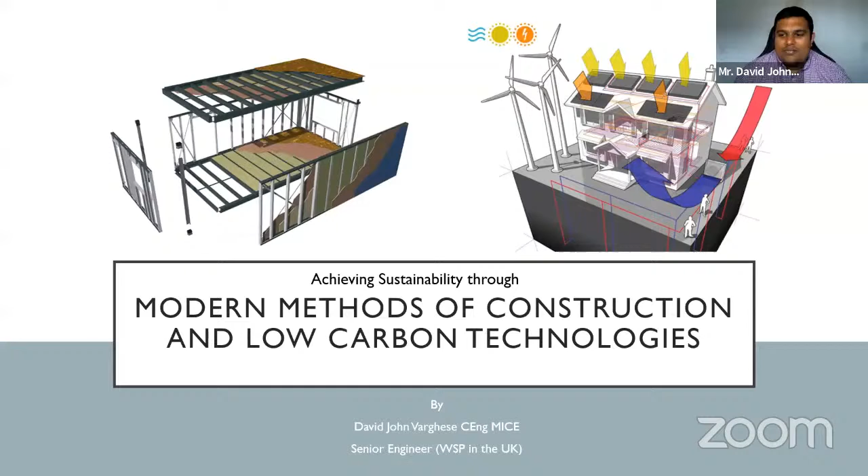I also thank my dad, Mr. Varghese, for asking me to do this, and hopefully make all of you, or at least some of you, think about how we can do better to improve sustainability in the work we do on a daily basis.

The presentation would approximately run for 50 to 55 minutes, with ideally a 5-minute break somewhere in the middle if required. The session would ideally be divided into an introduction about the industry in terms of energy usage and the need for MMC.

And then I would briefly explain what goes into achieving project delivery based on the systems used, such as BMS, which is Building Management Systems, along with some examples of energy storage that interest me. Lastly, I would show a few interesting projects that I worked on, also part of MMC and digital delivery in Hong Kong, and some interesting marketing videos they have generated for us to enjoy.

And finally, we'll close with a thought on what the future holds for MMC and energy storage.

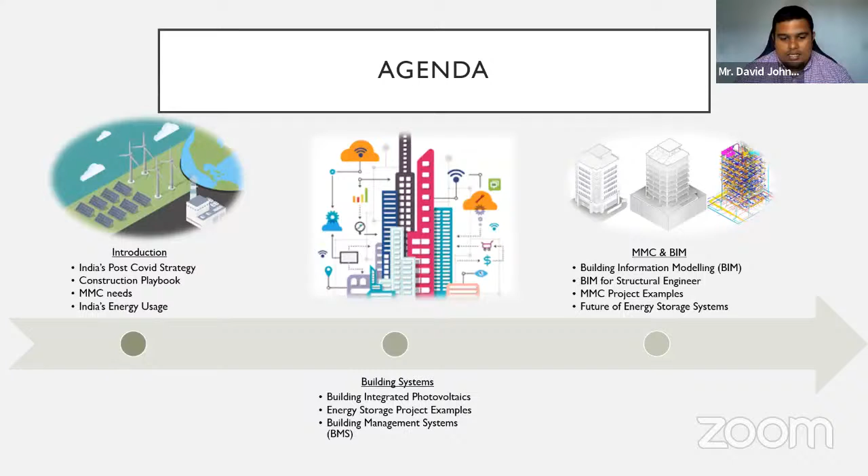So if you choose to take any of the engineering pathways, you would ideally want to be a part of a professional institution, wherever in the world, as all parts of the world have a system of professional institutions. That is the ICE in the UK, the Institution of Civil Engineers, or structural engineers. Similarly, in India, you've got the Institution of Structural Engineers, as well as the Institution of Engineers India. I would encourage all of you to join such a community and improve the way we do work, deliver our projects, and improve the quality of how we design things.

So I became a chartered member of the institution in 2021, and before that I completed my bachelor's in 2013 from NIT in Jalandhar. I did my master's in the UK in 2015.

I spent 4.5 years working in Hong Kong, and presently I'm working for a company called WSP in the UK in the civil and bridge engineering team. Some of the major projects I worked on include the longest open sea fixed link in the world, which is 55 kilometers long. Another project allowed me to do more of bridge erection and post-tensioning.

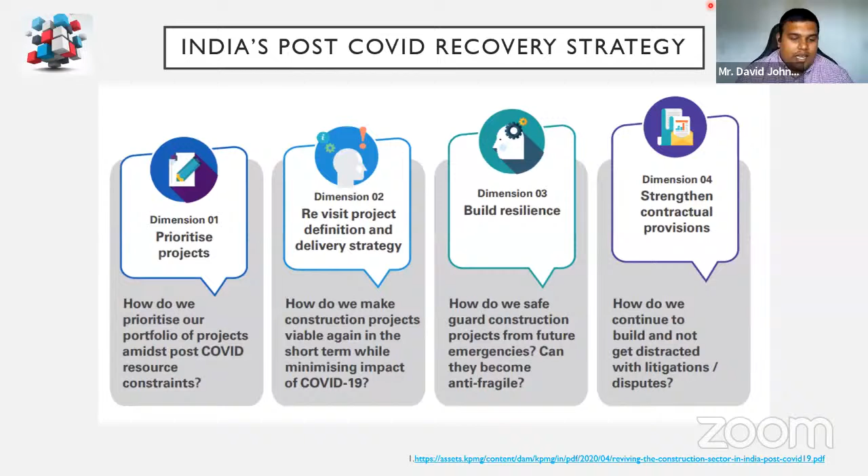When we say resilience, it just means how do we create an environment where if another COVID happens, we should not be affected by it. And how do we create contracts that allow such a scenario where it is less affected contractually, by doing projects which can be impacted by COVID.

Towards the end of COVID, they came up with services, or are still providing services, that carry out processes such as COVID-19 impact assessments, then they work out strategies, and do digitally enabled portfolios and project transformation. Finally, they emphasize setting up an outcome-driven program and program management office.

I'm just trying to tell the audience to remember this, because I'm going to show you what the UK's COVID recovery strategy is, which is basically similar. And this is what KPMG has to offer.

There are many companies following the same principles to get through COVID, as we are still recovering from COVID. Because of that, we have to understand how we are going to do this. Then the topic of Build Back Better comes out.

This was a webinar called the Green Recovery of Indian Economy. The foundation which manages it is called PAGE, and they provide integrated and holistic support to countries eradicating poverty, increasing jobs, social equity, strengthening livelihoods, environmental stewardship, and sustainable growth. This program is adaptive and aligns with national priorities to offer tailored and effective support to transform economies, to advance the 2030 agenda and the Paris Agreement on climate change.

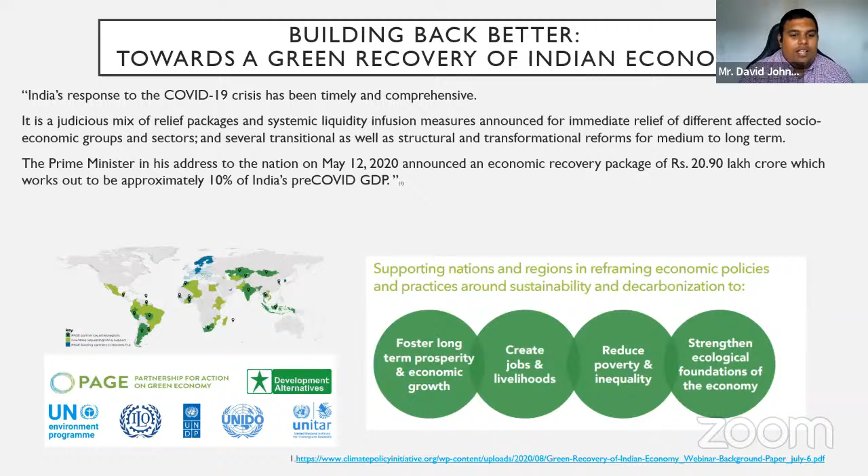This body has praised India's response towards COVID, where the Prime Minister addressed the nation that a package of 20 lakh crore, approximately 10% of India's GDP, would be provided for COVID recovery. PAGE suggests a few things we need to consider when we start looking at recovery.

For India to recover, it will involve promoting sustainable agriculture, promoting sustainable procurement, resource efficiency, circularity sections across supply chains, green jobs, and local enterprises.

This is in line with India's nationally determined contributions, the NDC, where they have set goals to further propagate a healthy and sustainable way of living, adopt a climate-friendly and cleaner path, and reduce its emissions per GDP from 33 to 35% by 2030 from the 2005 level. So if the money is spent wisely, we can achieve these targets.

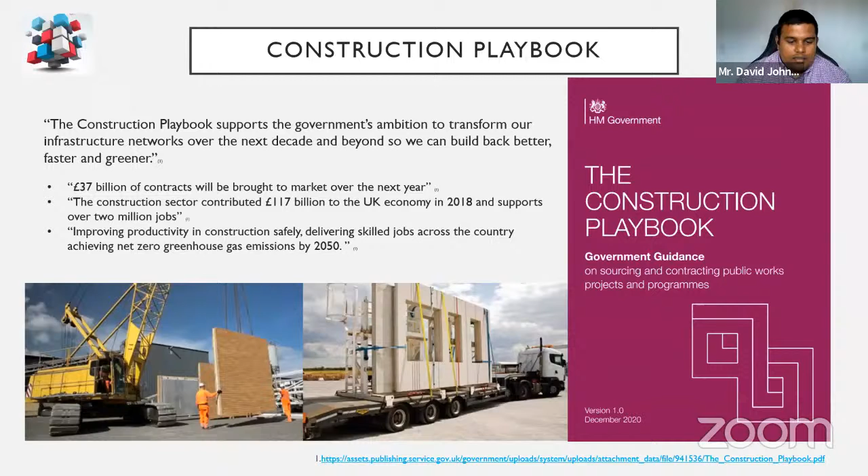So I'm just going a few pages into that document and showing you what they have defined as MMC. MMC is a framework of a 7-category framework, which can be divided into the following category definitions shown below. It's pre-manufactured primary structural systems, which can be prefabricated steel elements or precast elements.

It could be two-dimensional structural systems. When we say two-dimensional, we mean panels or walls, prefabricated and brought to site and assembled. Then the third one is prefabricated components.

When you have larger sections, you would have connections which are already ready-made within the pre-built, and they are brought to site and assembled. That's another way. The fourth is additive manufacturing, which uses 3D printing, which uses 3D printed concrete or steel. Yes, there is a steel bridge which is 3D printed recently.

And then there is number 5, you've got pre-manufactured non-structural assemblies. These mean facades, and anything which is the outer form of the structure that is not taking any loads. So typically it's going to be facades and all the finishing elements within the walls, in terms of UK housing, because you have insulated walls in the UK.

And then the other two sections focus on how site involvement is reduced by pre-doing work, similarly in the factory, but they're reducing the amount of manpower required to do that job by either using robotics or using methods which are improving the way things are done.

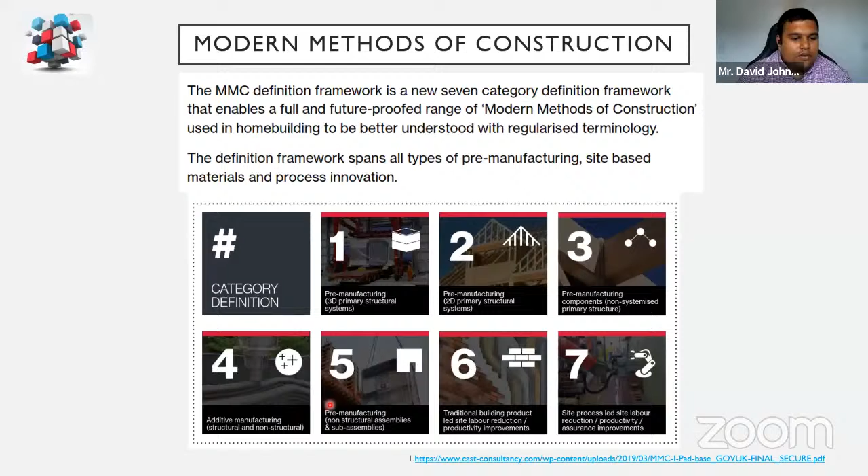And they have done a basic initial study of what the benefits of these 7 categories would do. So going back to these 5 categories, up to the pre-manufacturing non-structural assemblies, they have a high capital cost of materials in the initial stages, very low site labor, very little site supervision required, and very little plant and temporary works required on site.

And then the site process led loses a little bit of that material, a little more, there's less site labor compared to the pre-manufacturing approaches, and the site supervision is also reduced. Ideally, categories 6 to 7 are what has been happening for the past 2 to 3 years in the UK.

But this has actually gotten 3 to 4 fold in terms of how projects have been adopted, so they are actually benefiting from this information.

So that was what the COVID strategy looks like both in India and the UK, and what it would look like for India. The next part is energy sources.

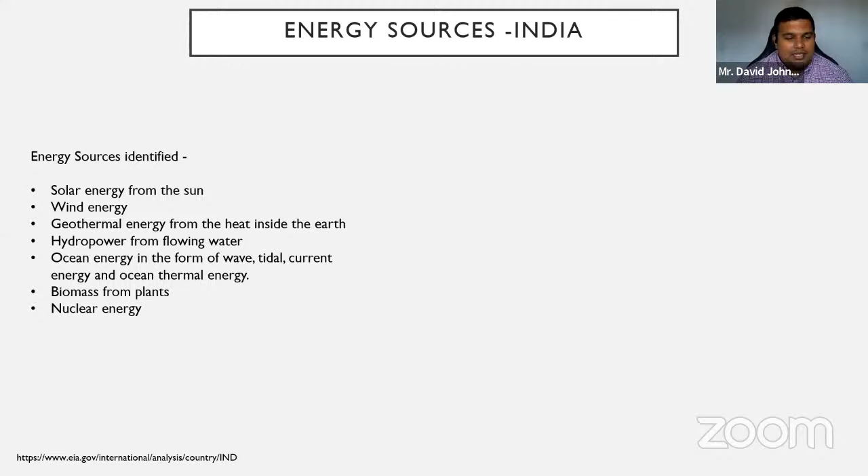So the very basics of energy sources: we get it from the sun, from wind, from geothermal energy from the heat of the earth, hydropower from flowing water, ocean energy in the form of waves and tidal currents, biomass from plants, and nuclear energy, which is not completely natural but uses manpower to generate energy.

So in India, as things stand, in terms of renewables we account for less than 4%, based on the International Energy Agency. And India's generation of electricity from coal is close to 70%. So this is where we are lagging behind, and we have to understand that it is behind.

And the question is, what are we going to do about it? Because the consumption and requirement of electricity generation in India is not going to reduce, it's only going to increase. And one way of looking at it is with solar energy, which is directly coming from the sun, which I will be explaining in a bit.

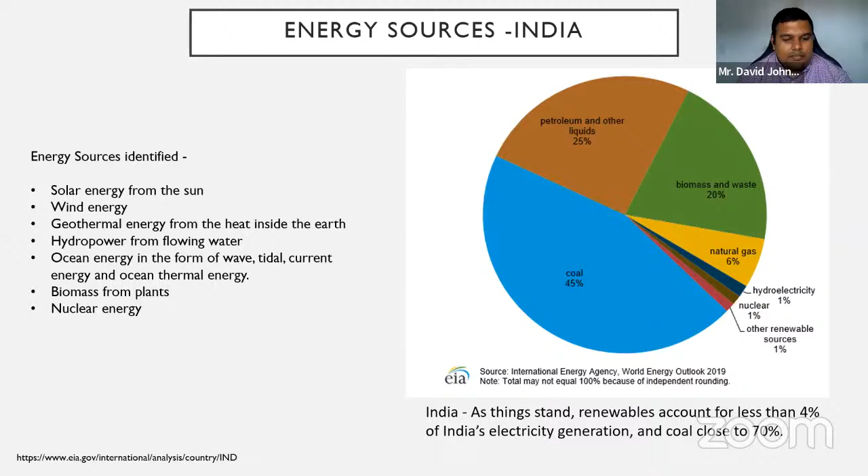So this is what they are claiming, or estimating. But we have to understand that in India we will need 869 gigawatts of power in the next 20 years. Still, we would be much better than what we are right now, going from 4% to probably 35 to 40% if we could achieve that.

And why I choose to talk about solar is it's the most developing form of technology at this moment. It is widespread, and I'll explain that in a little bit.

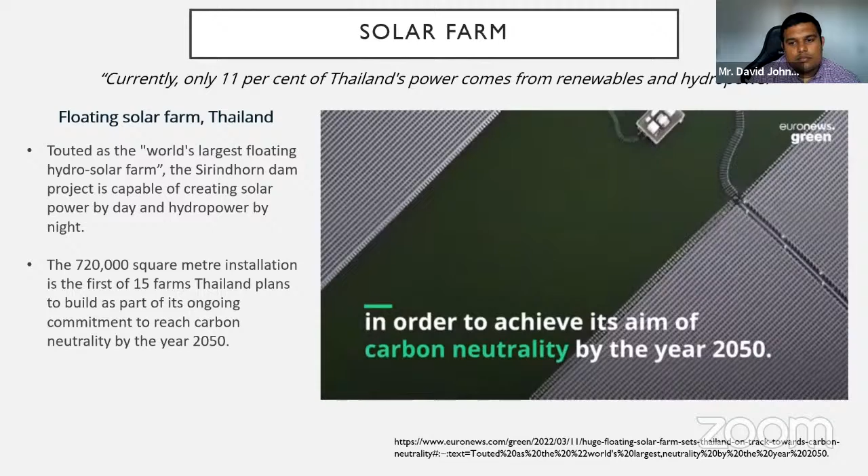We have an energy management system to control and balance between hydropower and solar power. This is the biggest project of its kind in the world.

144,000 panels, equivalent to 70 football fields. This project is suitable for Thailand because it helps meet the target more rapidly.

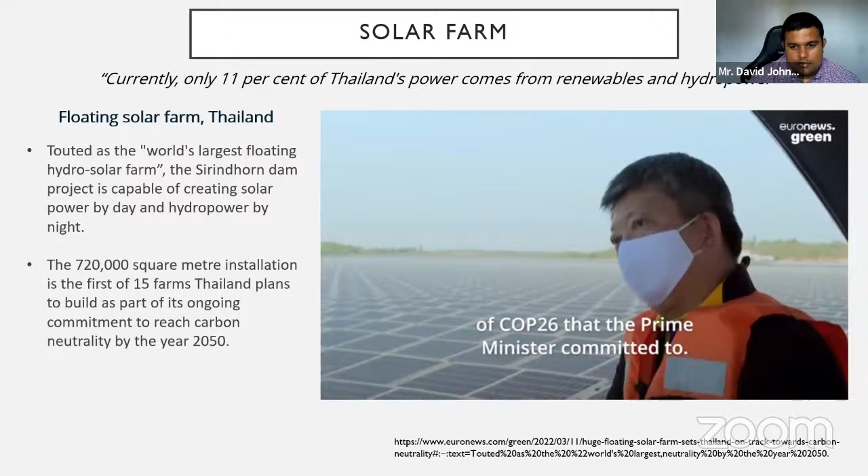So it has two applications. It's not just solar panels to generate energy. Wherever there are places with drought and a lot of evaporation happening during summer, you would use a panel like this to cover the water and prevent evaporation. Elsewhere, they use black balls to absorb heat and prevent evaporation, so this can be a combined solution for a place like India, where water evaporates during the drought season.

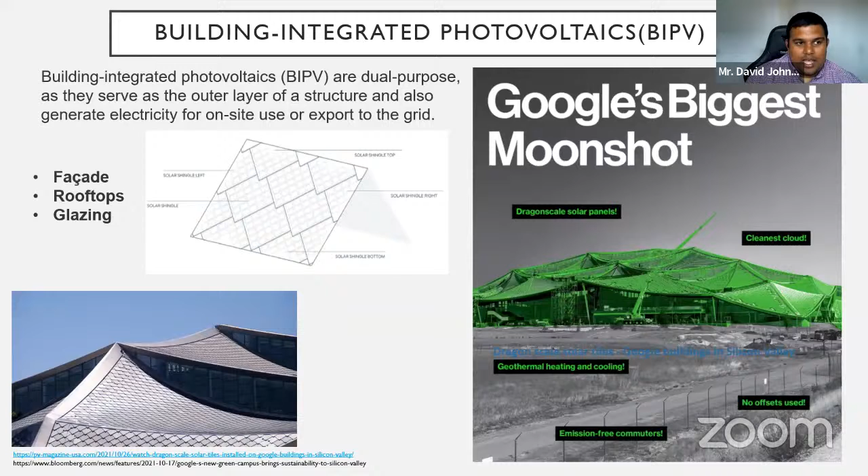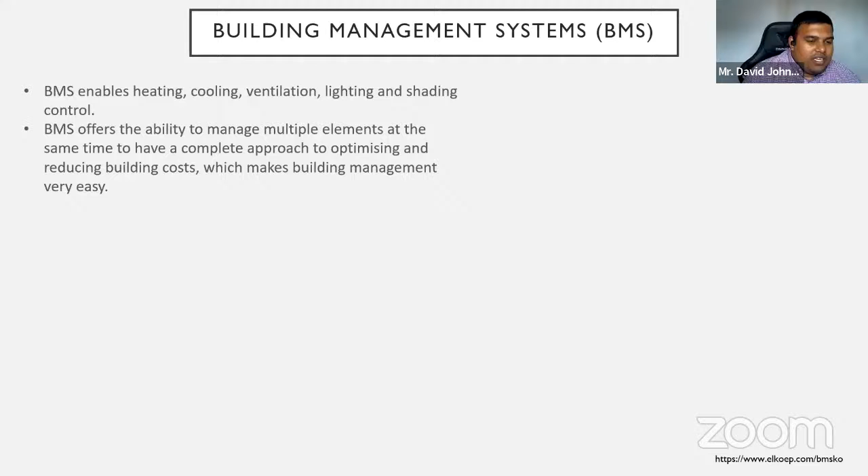So all these are talking about software applications and implementations within an existing building. There are a lot of things you may want to think about in a building, how to make it more efficient in using less energy, less water.

How do you optimize the building to put the best airflow to reduce spread of COVID if it happens within a building, or how do you improve the ventilation in a building, which ever since COVID happened has been the number one priority by many employers across the world who work in offices. So for them BMS has become very important in terms of redesigning their own layout. They have gone to changing office layouts just because of how important it is to improve the airflow within a building.

So building management system allows you to do a lot of that. It also helps you to pick up issues where, say, you have leaks in the pipes, or rust happening, or a cold spot in the building, or an inefficient air conditioning system. All these things can be picked up by sensors within the building and read by a device like an app on the phone, or an HMI device, a human machine interface device, which will help you see these are the things happening, and then quickly know what you need to do to make it more efficient. So this is one way of looking at it to make it sustainable in the long term, maintaining this without having to wait till something happens.

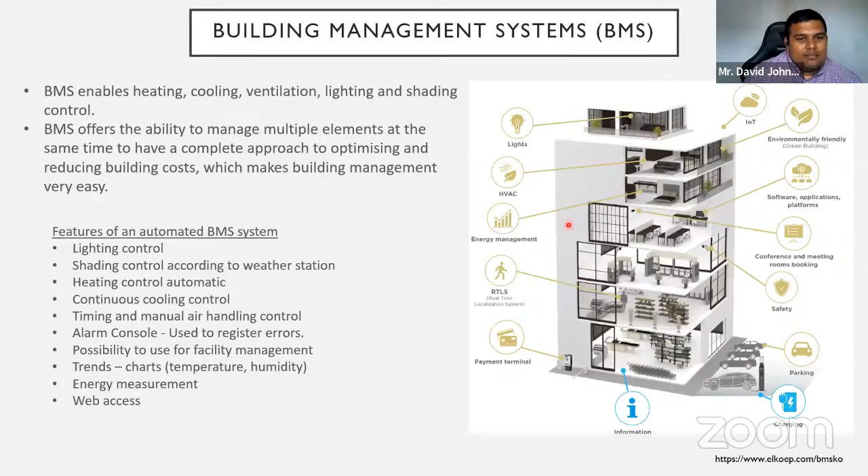And the other thing about the other system is building information modeling, which I think many of us as structural engineers are aware of, but may not have practiced on a daily basis. But to an extent, anything in a 3D model is already a start for building information modeling.

BIM, basically, is a set of technologies, processes, and policies enabling multiple stakeholders to collaboratively design, construct, and operate a facility in virtual space. When I say stakeholders, I mean clients, engineers, contractors. If the contracting company uses it, it also goes back to BMS. So after it's built, it's managed, and all these systems are in place so they can talk to each other.

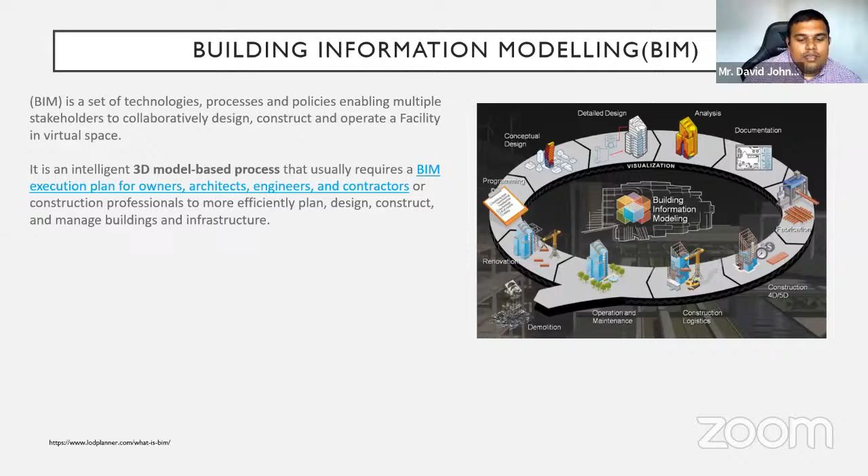For MMC it is crucial, because the amount of detail required in delivering a modern method constructed building is extreme. But when it's extreme, it is fully detailed. Elements have to be done within the design, in the initial design itself, to ensure that everything else fits together.

When we say everything else fits together, it's not just the structural elements. You're talking about all the M&E, that is mechanical and electrical elements. You have HVAC, the air conditioning and ventilation. All these elements have to come together, making sure it doesn't clash once you've built the whole thing.

And you can coordinate how these things are going to be built in stages. So you would try to find out if this part of the structure is built at this time, this is the time the mechanical and electrical part has to go in. So you would have a more efficient construction program or timeline to make sure that happens better.

So basically we are forced to do this so that we can have the best solution, optimizing as much as we can within the initial stages, because once it's built, it's very hard to change. Ideally the structural behavior is a bit different, but not so much different. Changing becomes harder as you're trying to make it more standardized or with more individual elements.

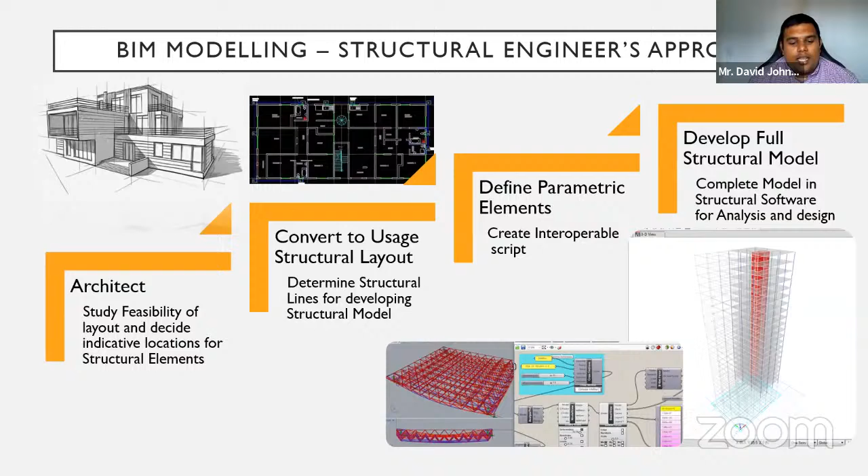It's very seamless, and by doing this repeatedly we achieve a much reduced amount of materials, more efficient designs, and much higher quality in terms of tolerances. This helps the structural engineer. Since I've come to the UK, I've done my version of this in my work as a bridge engineer. This is basically a video.

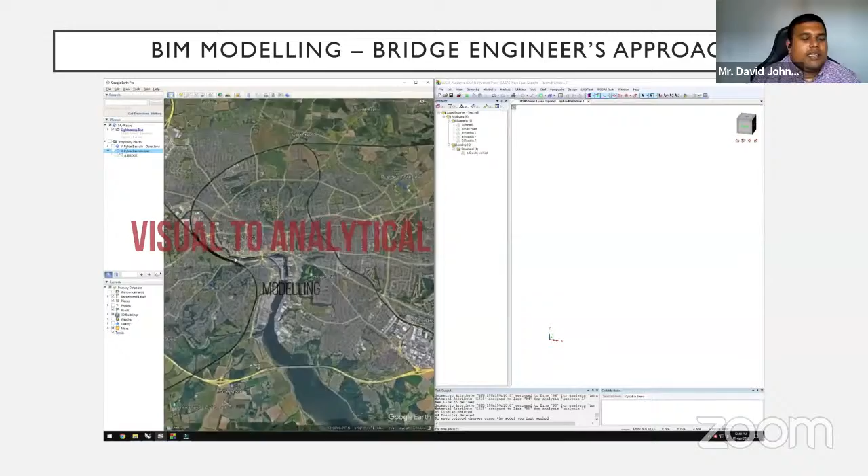On the right side is a software called Lusas. On the left side is just Google Earth and the 3D version of it. This is how we presented our solution to the client. I drew a model in 3-dimensional space for Google, created this model, and this is what we were proposing as a solution for the client. You can see the whole structure isn't designed yet, only the truss bridge.

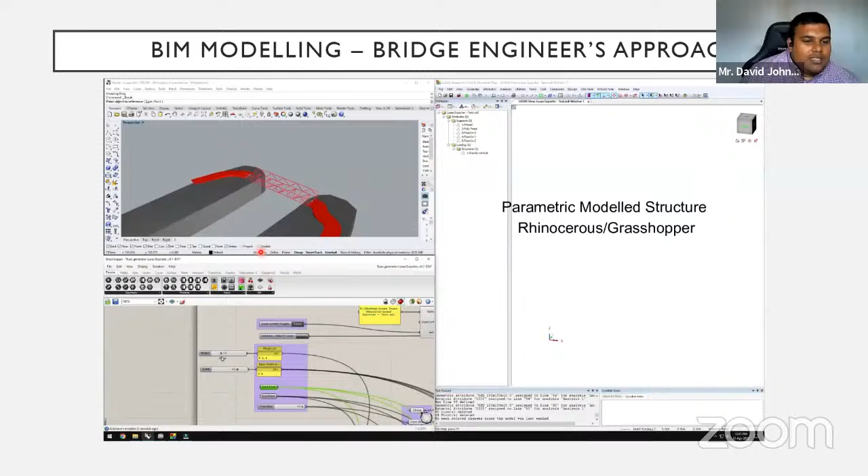I've taken that truss bridge and its boundary conditions into a Rhino Grasshopper model, if you're aware of that kind of software. These 2 points are the only points I defined in my model. The rest is all parametric, with all my parameters happening here in Grasshopper. I've created a truss with a certain base and width, and I can keep adjusting them as much as I want.

It's creating a structural model now. When I click the button, it starts drawing that bridge with the elements and sections included. So I just need to put in my loads and run the analysis. Here I can optimize how many bays I want and the sizing of the members. This normally would take me half a day to model and analyze, but now it helps me do the whole process in 15 minutes.

That's how much optimization we can achieve by using a BIM model, or the bridge engineer's approach towards a BIM solution.

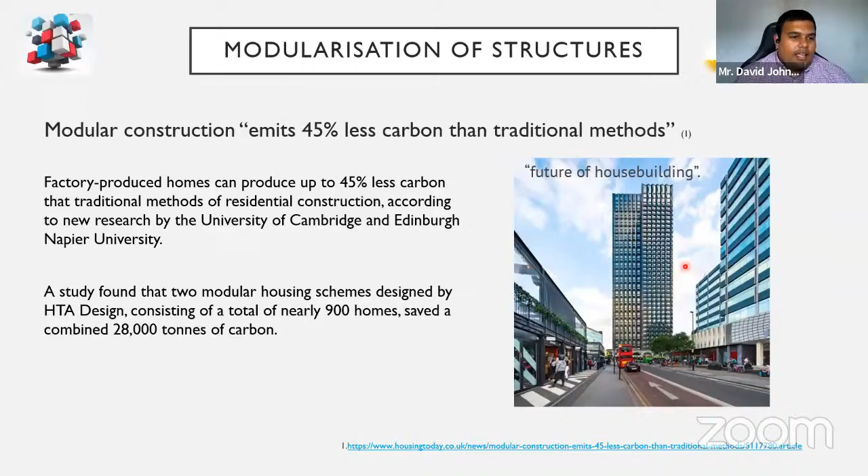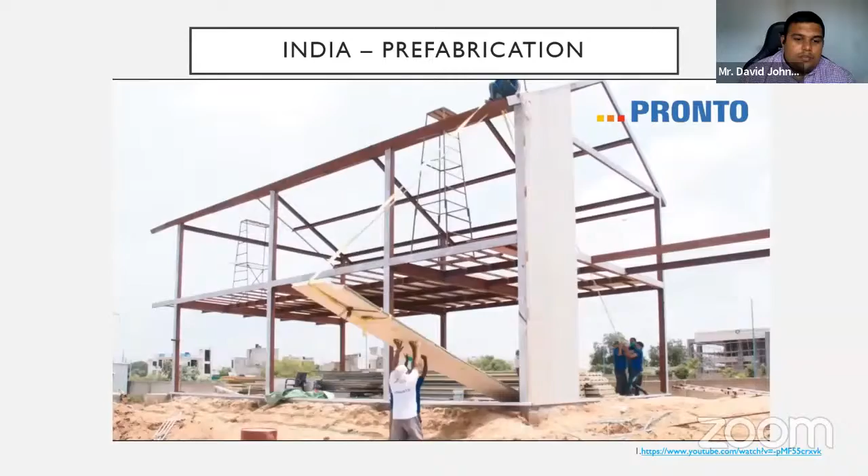Please do notice the level of safety on this site, and this is one of those sites where, although the marketing is very good, safety could have been better.

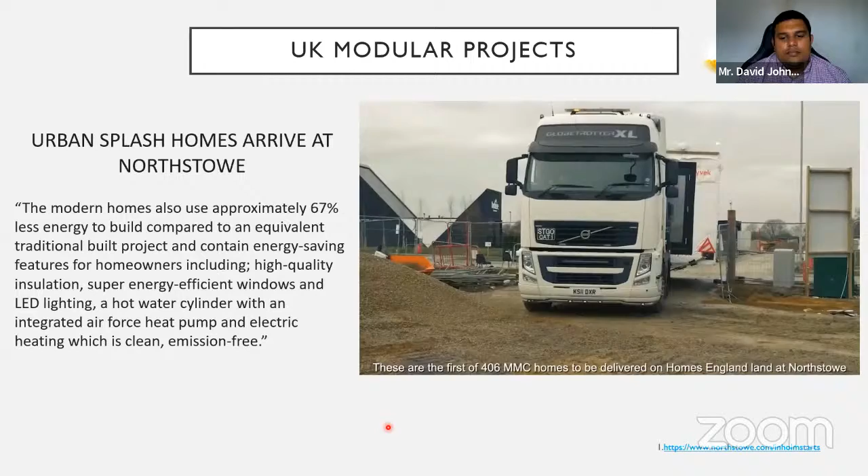These are the first of 406 MMC homes to be delivered on Homes England land at Northstowe, thanks to our groundbreaking £90 million deal with Japanese house builders Sekisui House and regeneration specialists Urban Splash.

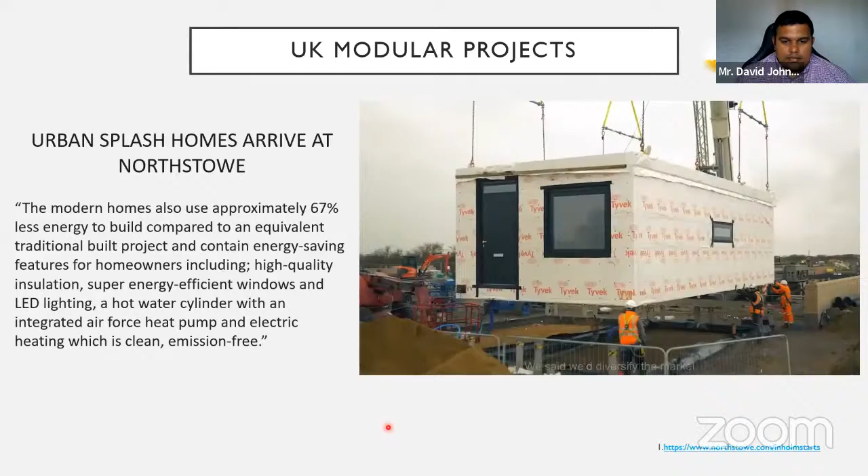We said we'd support MMC through investment and on our land. We said we'd diversify the markets. Now this urban village, part of a 10,000 home new town, will be part of our MMC research study, driving industry innovation.

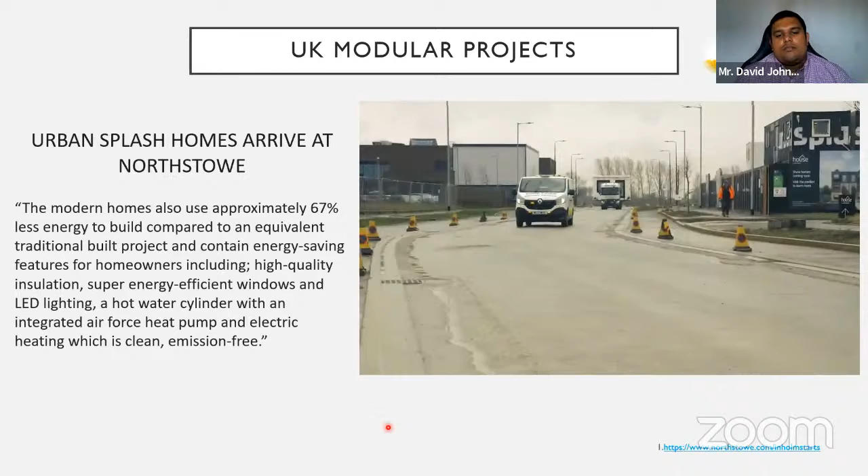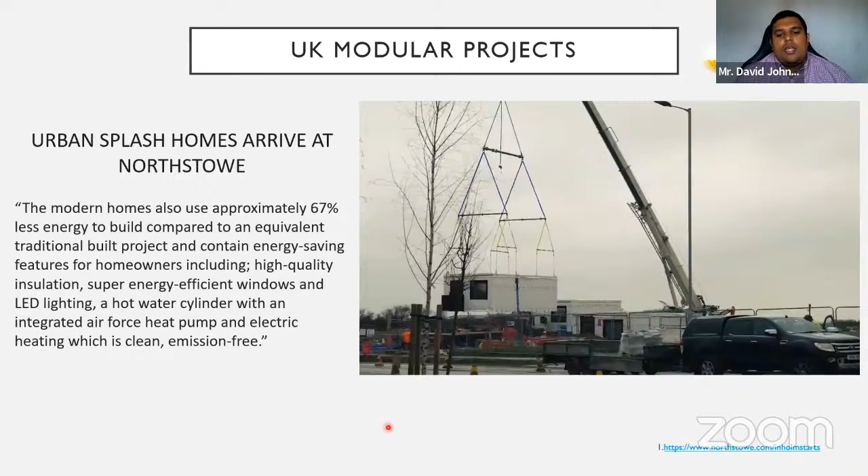They are around 5.5 by 10 or 11 meters in size. They're wider than the truck, and they have to use special vehicles to guide these on the main road.

In Hong Kong, there is a bigger struggle. It's only 3.5 as the limit, but the length is 12, and you've got a height restriction of 4.7 if you use a low bed trailer, or you have other options.

Together, we're making homes happen.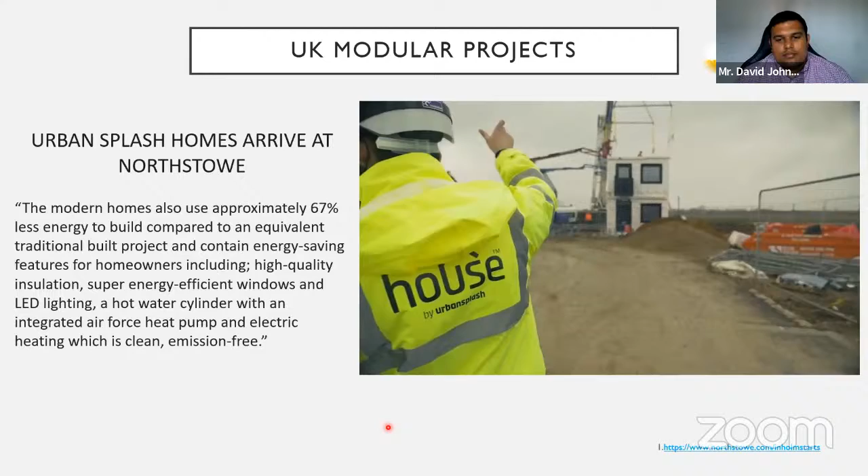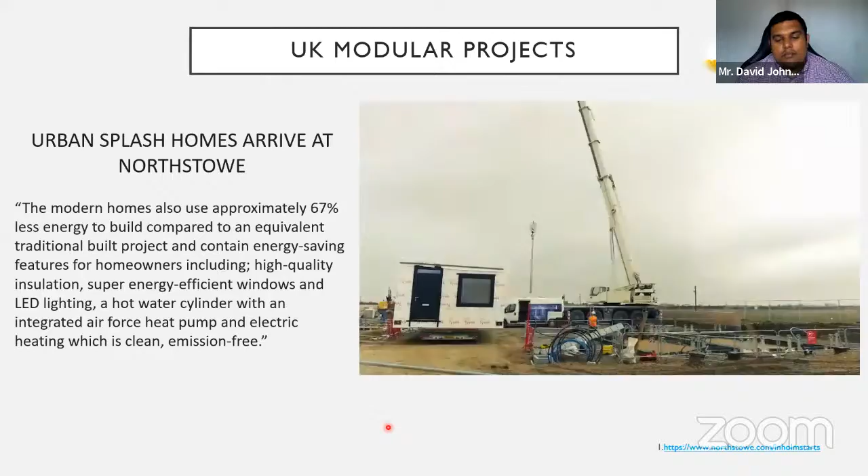You can see that the solar panels are just panels, but they're integrated before the site is built. So you can see within a day that is one house, the two stories, within a day that is delivered and built.

So when these are manufactured in the factory, the ground conditions are being developed simultaneously. So you can imagine how much time you save in achieving such a solution.

So we will go on to the next one, going to Hong Kong, which is a project I've worked on. This is basically, as you see, a quarantine center for quarantining people who have tested positive for COVID. This is very near the airport, where you will be quarantined for 21 days if you end up in Hong Kong with a positive result.

This design, in 2020 when COVID happened, was designed to be built in 90 days. And as you may think, it's much of a challenge.

The first 200 units—the total is much more than that—the first 200 was done in 90 days. And what that meant is, I was the lead designer, and it took me 36 hours to design. It's not much of a design, but the point is, it is a very reused, standardized system.

So we have developed a design which incorporates all the modular elements. And the other part of it is it could be dismantled later on to form another structure, like a residential building, once COVID is managed within Hong Kong.

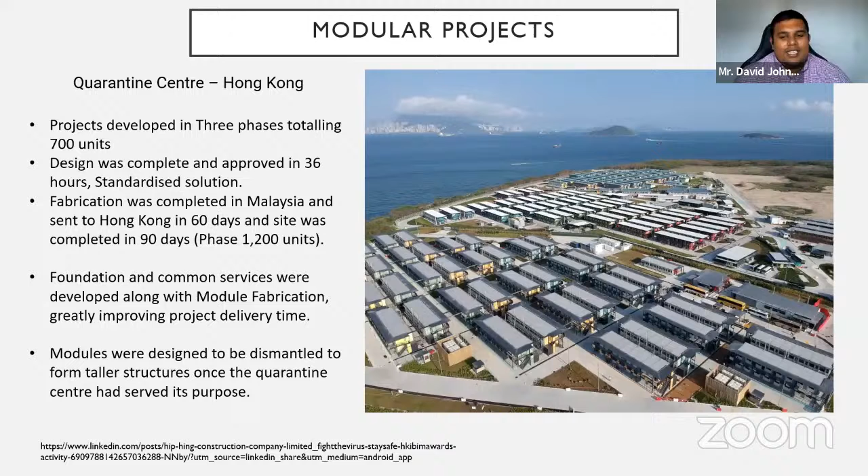The thing about 36 hours is we have to get approval, and approval takes a bit of time. So the design took 12 hours, getting approval took 24 hours. That is the amount of time spent on the design.

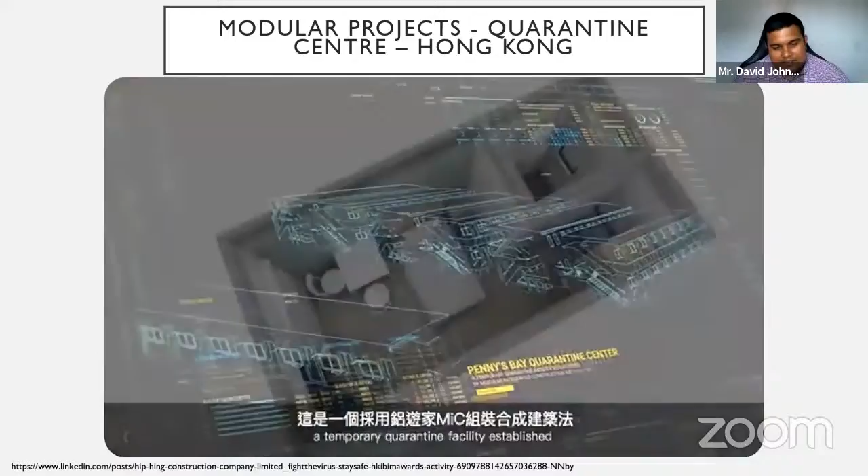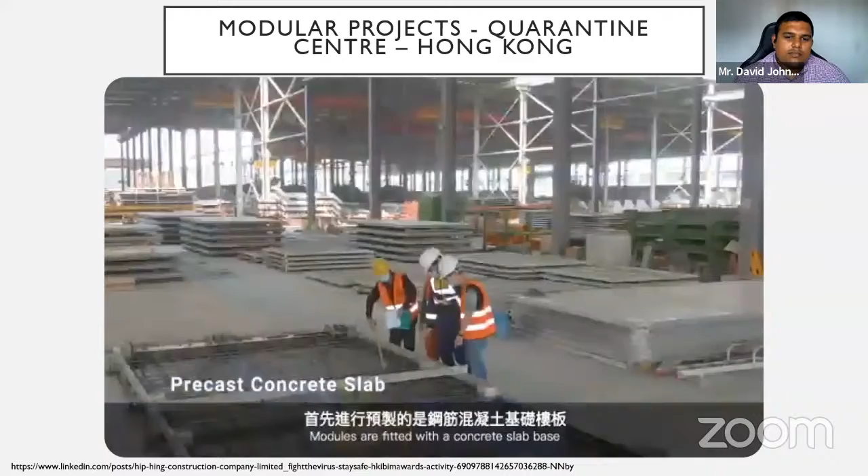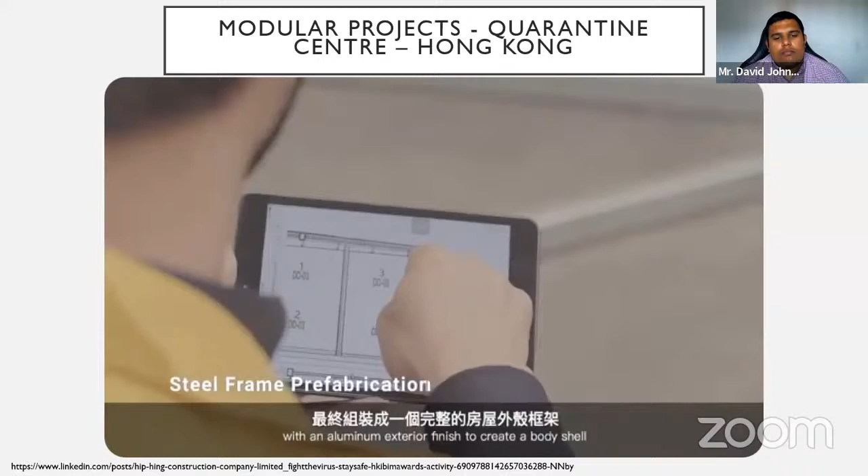Modules are fitted with a concrete slab base, then steel structures are installed with certified fire protection board with an aluminum exterior finish to create a body shell. From here, the interior and MEP are built and installed, from the concrete slab, steel frame, MEP system, to the interior fitting out of each module. Every part of the module is assembled with quality and care.

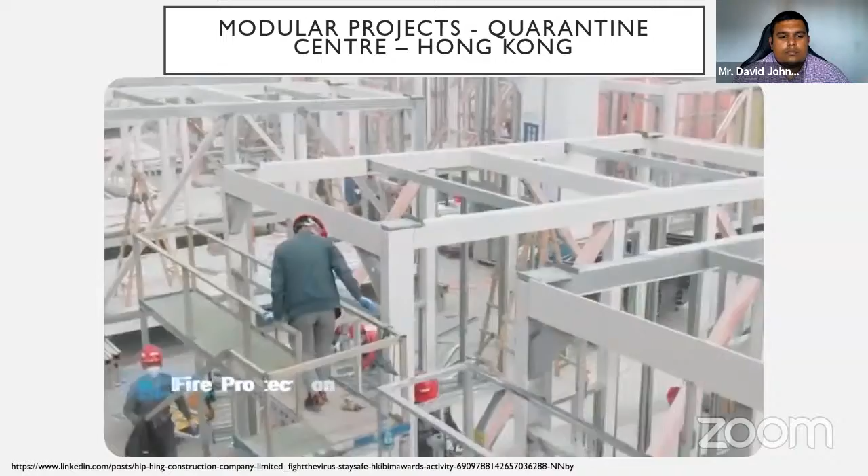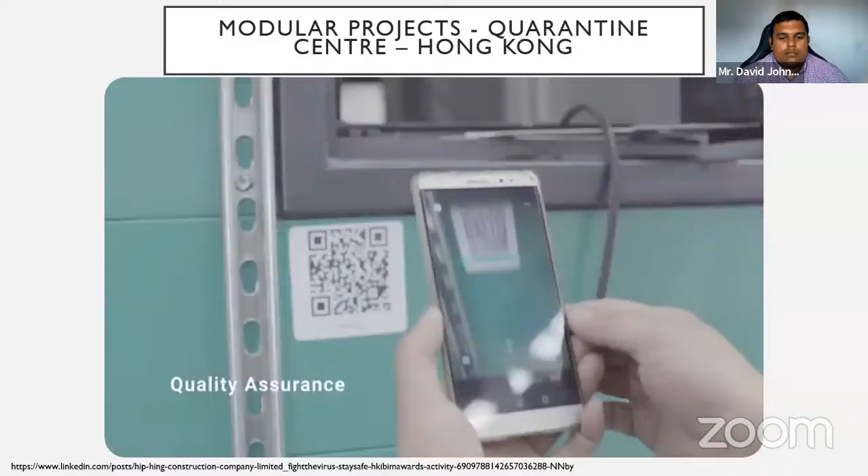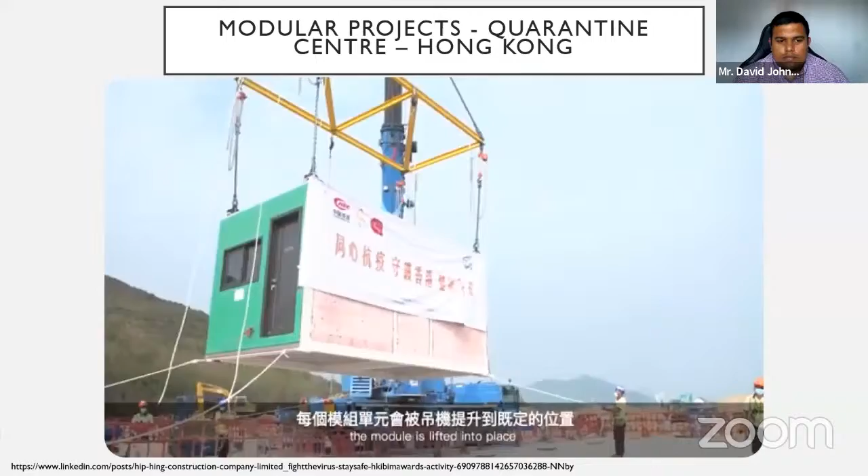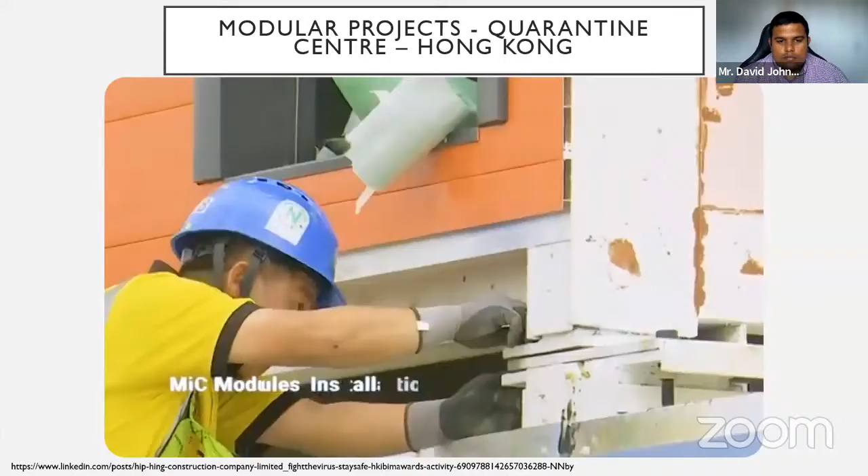After its initial assembly in the factory, the modules are ready to ship for installation. During installation, the module is lifted into place and interlocked with other modules to create a block. Staircases and corridors are built as MEP installation begins as well. After an on-site quality check and commissioning, the units are ready to use.

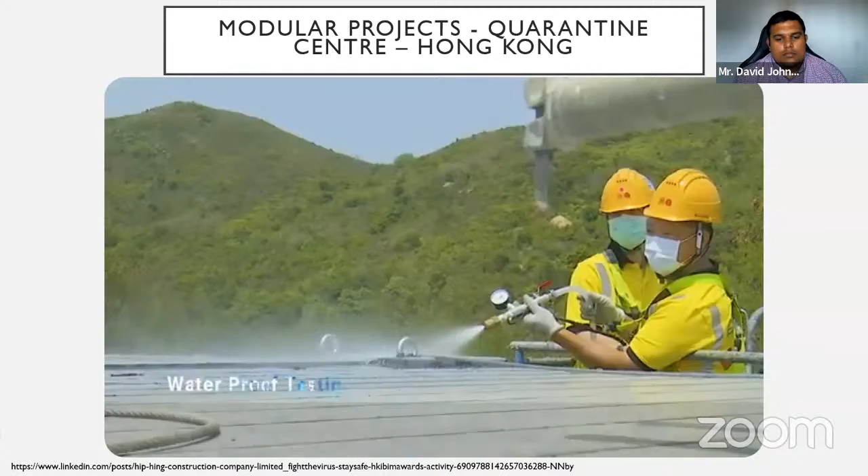Each module can also be uninstalled and reinstalled to suit different designs and location changes.

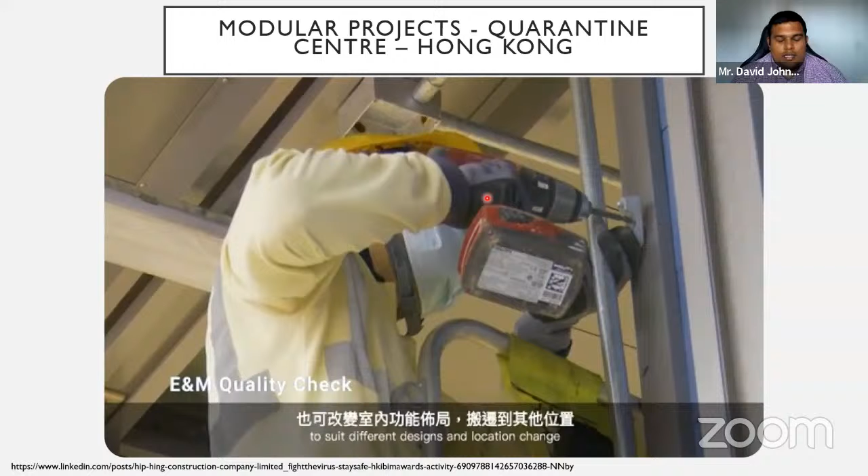This is what I mentioned - it can be designed to be removed. So this was our contractual requirement, to create a structure which can be dismantled when required.

Similarly, for another contractor on the same project, this design is again the same thing, but this is their promotional marketing video.

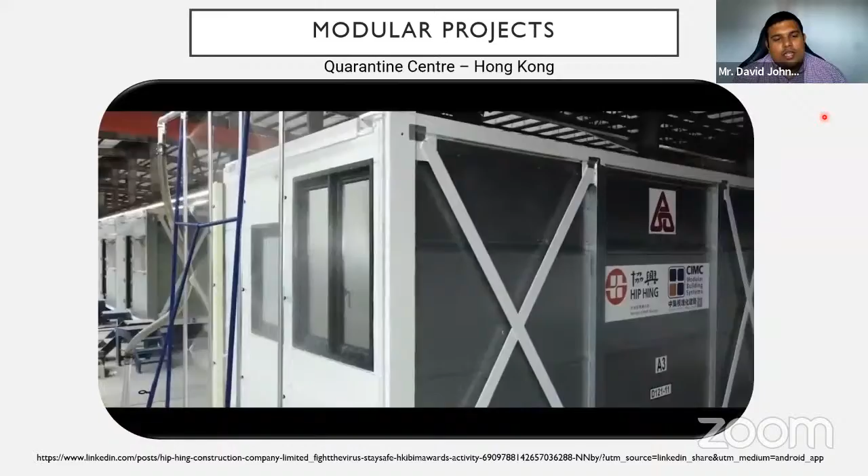This is the next phase, and they had improved their manufacturing process. They have robotic hands and a lot more procedures to achieve better quality. The quality was already very high, but you can do better by automating many things in this process.

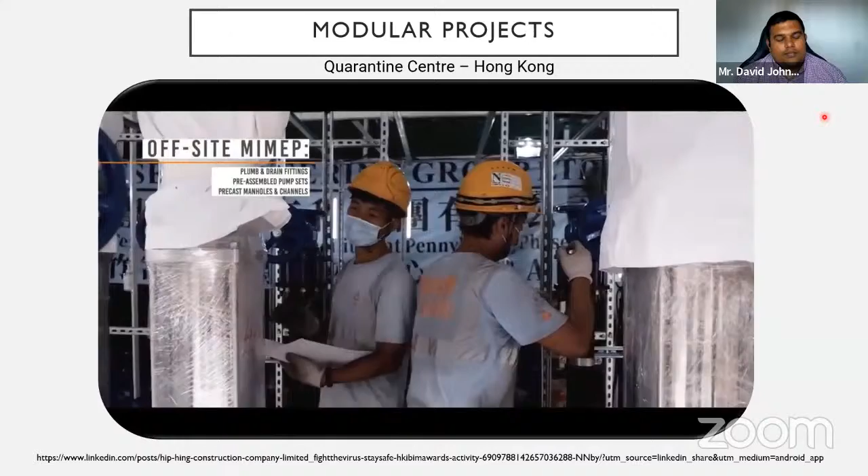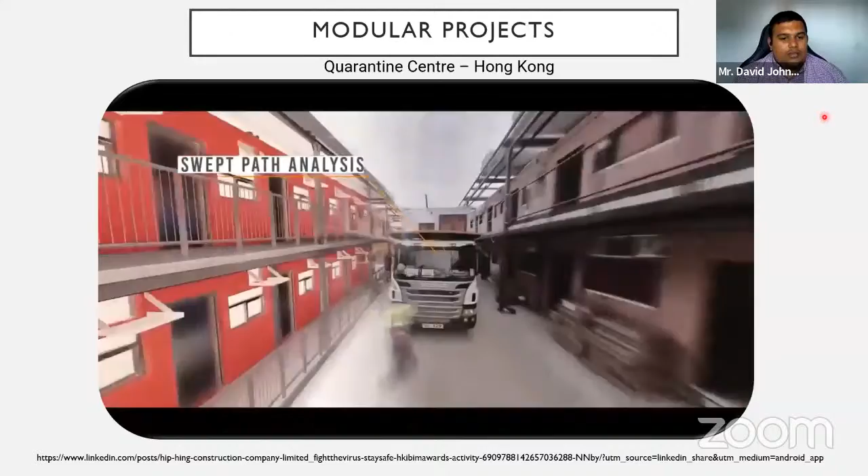You can see the amount of BIM involvement - they're creating all the off-site MiMEP, mechanical, electrical, plumbing services, then all the full site completion construction phases. This is basically BIM, which has 8 dimensions. This is where the 4th, 5th, 6th dimensions come in - time, costs, and structural analysis, which is part of the BIM requirement. They're showing what they've analyzed and what's being done. That is the level of detail they've gone through to achieve this. These are not very big structures, but the amount of detail required is high.

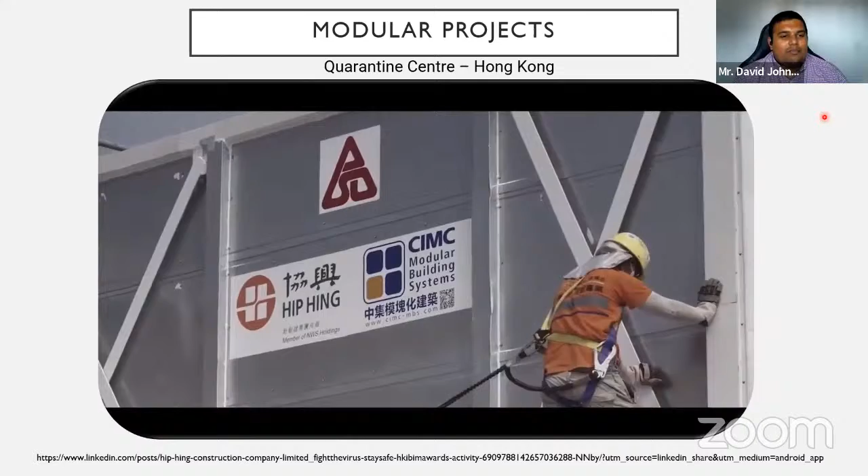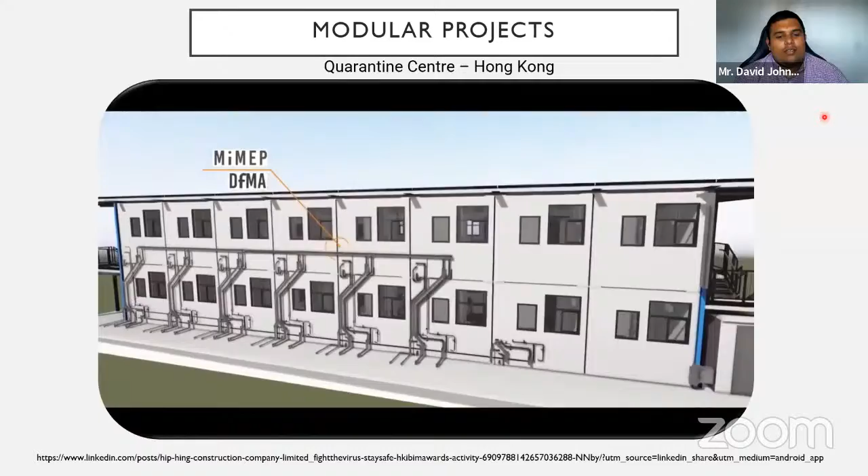The tolerance level for these buildings, when we are designing them, our specification is 2mm horizontally and vertically. They contract to achieve that, and in 2 stories it's still feasible. When you go 17 to 18 stories, 100 meters above, that's where the challenge happens. But it is still being done.

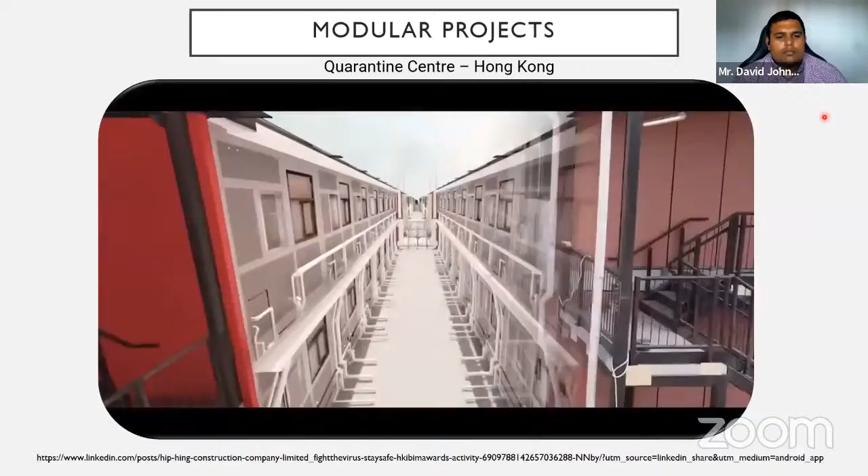The way we had to develop this structure, as you can see on the right side of the screen, is how the system works. These are modules, individual boxes, as you've seen altogether. This is an in-situ slab, a flat slab, cast on site. Same goes with the in-situ core - the core structure is basically 2 cores, a staircase and a lift core. These are the 2 structures that take all the lateral forces from wind.

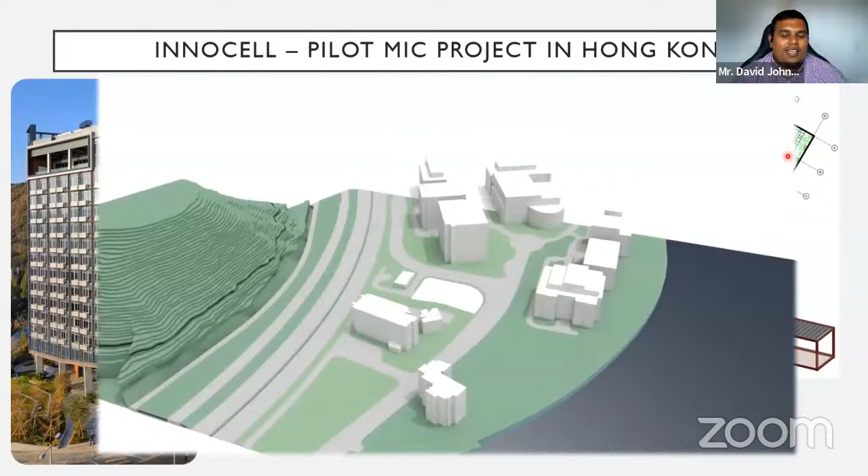I will just show you the... I can't play the video, okay, I will skip now. I'm just trying to show what the construction sequence is, but I will show you that in another video.

This project, as you know, is the first of its kind - it was in the news, and you can see how it's being built.

About 80 to 90% of finishes and the furniture installation will be prefabricated, pre-installed in the factory. It's first of the kind in Hong Kong.

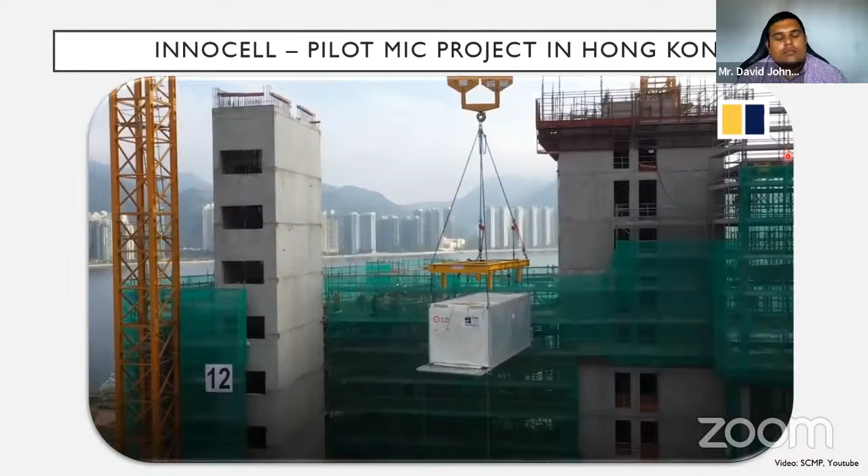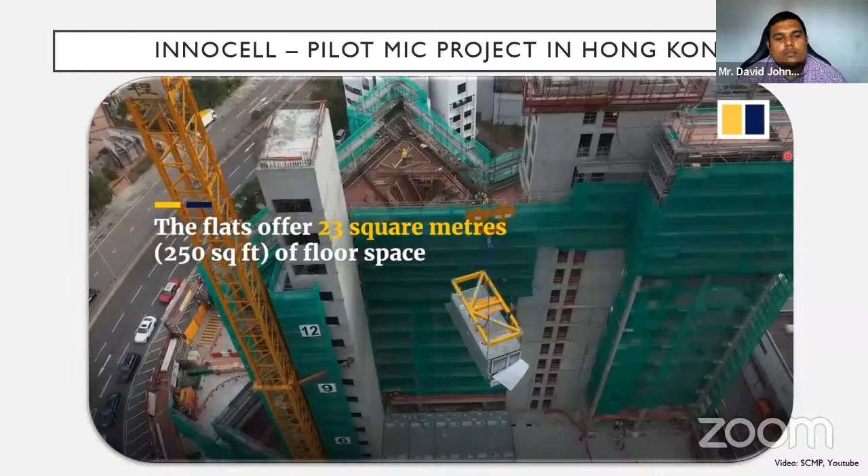These are 25-ton capacity tower cranes, which is also rare in the world. The first two were in Hong Kong for this building, and then Hong Kong had to procure more. This is a construction method with enhanced construction efficiency, safety, and productivity.

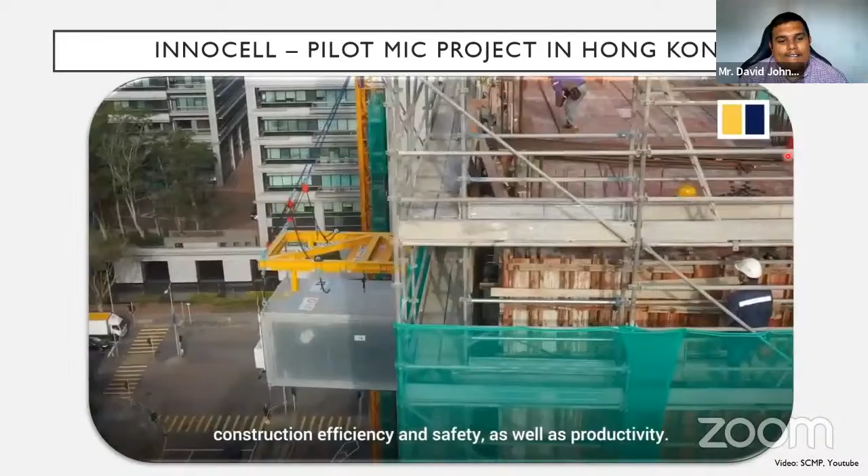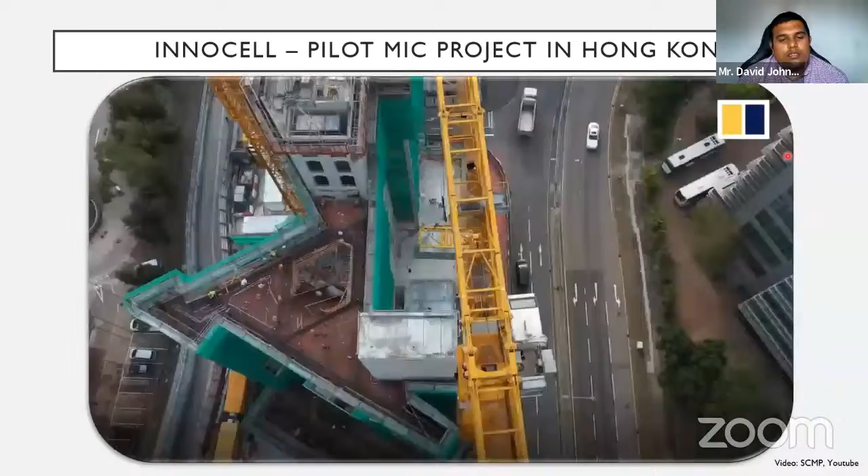Each crane can install 15 units per day, so with two cranes we can install about 30 units. One floor only has 30 units, so we can install all the units within 90 days. The whole structure is built in 3 months—structurally complete, not finishes, but structurally complete with 90% of the modules finished.

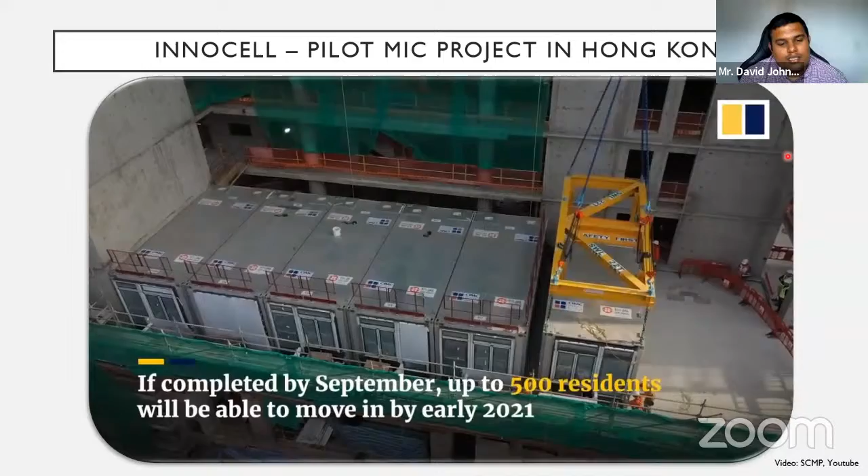The project was handed over by October as completed to the client. This is a construction sequence for a project which I was the lead engineer on.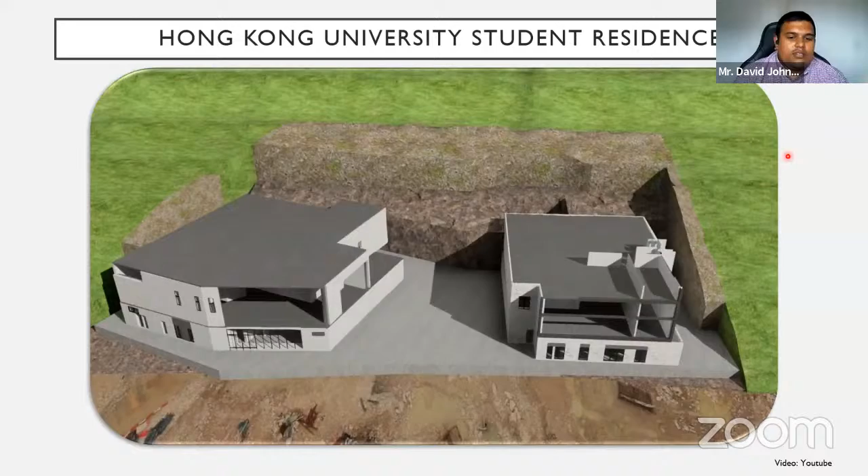Once we started doing modular buildings, all of this is meant to show these are all concrete in-situ structures, only the structure above. This is the core. The modules are the ones which are going to come in. And this is 30 stories.

When you have 30 stories, your wind load and lateral stability becomes even more critical. If you look here, there is no slab stitching, so you can think about these modules separately at the edges of the outside of the base. So these edge areas become very susceptible to lateral forces. Stabilizing that means our connection takes more stresses, which you have to design for.

But the technology has improved so much that even the lateral stability walls can be done precast.

So this is the last two slides. So far you've seen the MMC projects focusing on modular solutions, and then energy solutions implementing solar panels within the building. Now these can work together to form a very excellent and elegant solution, as I would recommend.

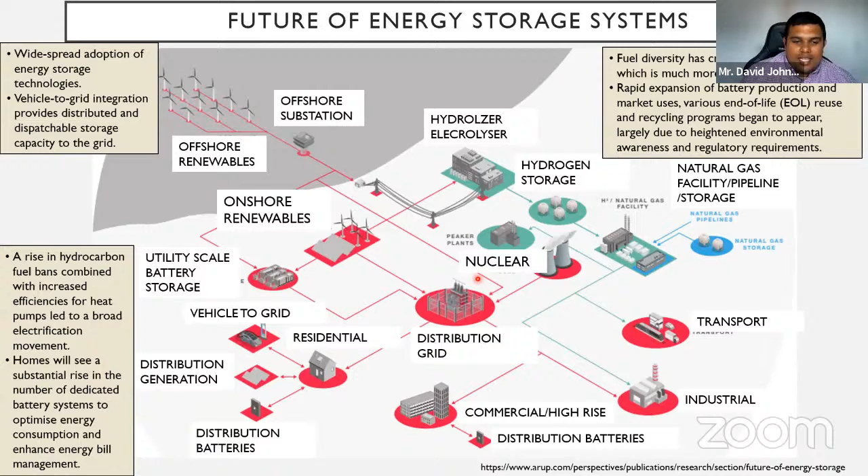And this is the last slide, and this is just a video of somebody. His name is Ashraf, and he's the president of CSI, the software company that makes ETABS and SAP. He created a video to present to all of us, to make us appreciate our career. I'm just playing this video because I watch it a number of times throughout my week to keep me motivated to do the things I do.

Do I love New York or do I love New York? This city is literally the testimony to the grandeur of our profession. Just look around, that's all your work, every solitary building. You do stuff that actually makes things stand. When you start thinking about that, it's miraculous. It's only because of you that we actually have an economic infrastructure. You give people ways to arrive at work and then to work in an amazing building like this one, which doesn't sway around in the wind and make you seasick. These things are just taken for granted.

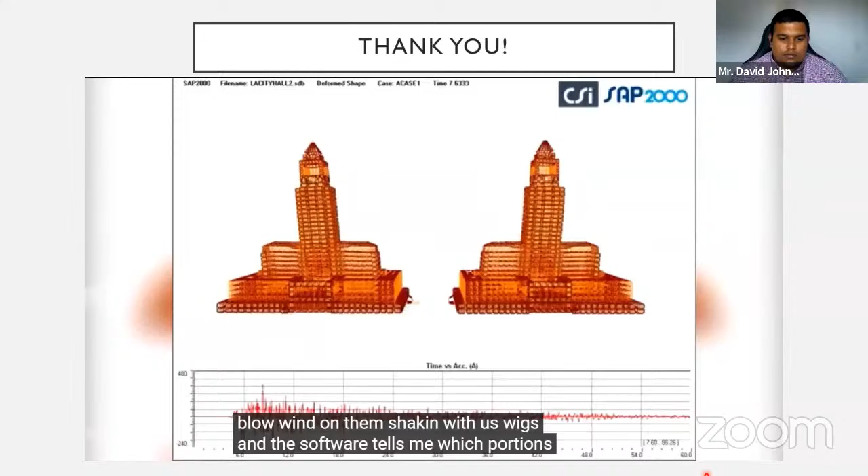People are totally blown away when they find out what you do. When people ask me, what do you do? I say, I create mathematical models of buildings and bridges in the computer memory. I blow wind on them, shake them with earthquakes, and the software tells me which portions of the building are going to break apart, so I can fix them before it's even built. And they look at you like, are you some kind of a genius or what? But you see, people don't know.

People have no idea what we do because we don't invite them. Our conventions are about us. We all get together, talk about the amazing things that we do, pat each other on the back, and go home. Meanwhile, outside, nobody has any idea what we do. We need to invite outsiders, bring them to a party, make them feel amazing. When they come to an event and look, oh my God, look at this event, it's better than Hollywood and I was invited.

Party is to celebrate our amazing profession, but more importantly, it's to celebrate every one of you. The beauty about your profession is that you make life better for all of humanity on a daily basis. So let's have an incredibly big hand for all of us.